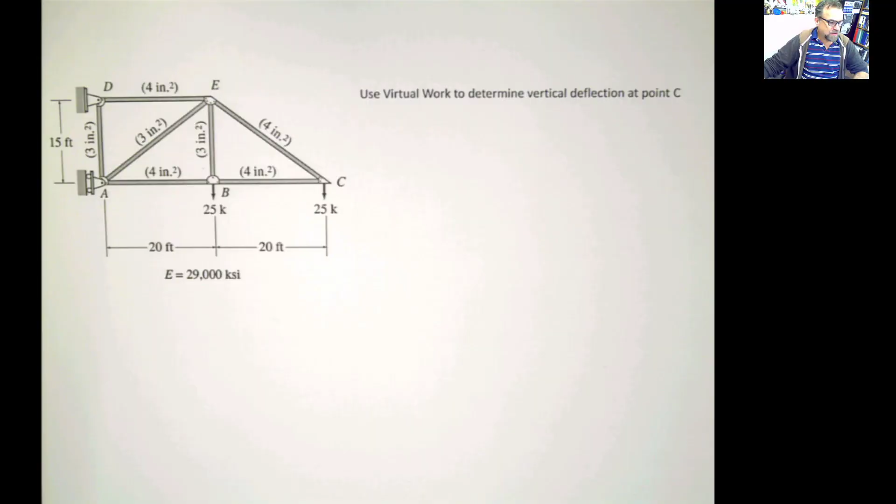So I'm going to solve this problem using virtual work. The problem is asking to calculate the deflection at point C. Let's start working that out and see how it works.

First thing I always like to do, remember the philosophy of virtual work: the external work has to be equal to the internal work. The external work is given by an external virtual force, which by convenience is given a value of 1, multiplied by the displacement or rotation in the direction we are looking for. In this case, we're not talking about rotation, we're talking about deflection.

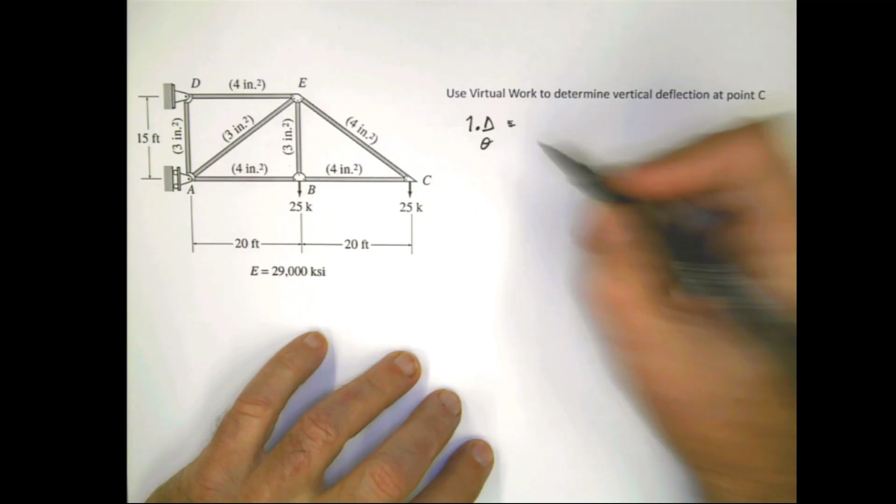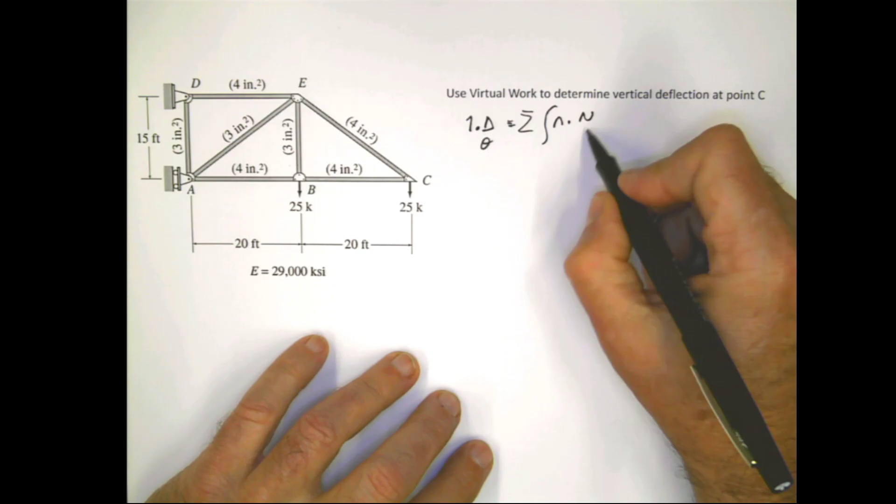That has to be equal to the internal work. The internal work is the summation of all those internal forces. For the case of the truss, it's only axial forces multiplied by the deformation, which is this one. Remember, deformation is PL over AE, and the internal normal forces - I'm calling them normal here instead of axial, because sometimes A gets confused with the area, and I don't want that to happen. So that's why I'm calling them normal forces.

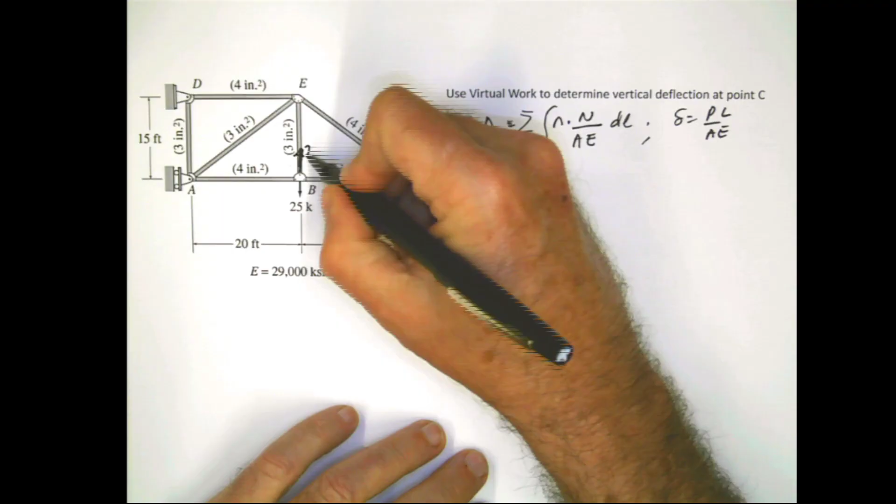First step for doing this is solving the real truss. How are we going to solve it? Depends on you. You can start from this joint if you want to, because there's only two unknowns, and then move here. If you look at this joint, immediately you can see that this force is 25. Just by doing the analysis over there, you can come to this joint and calculate this and that.

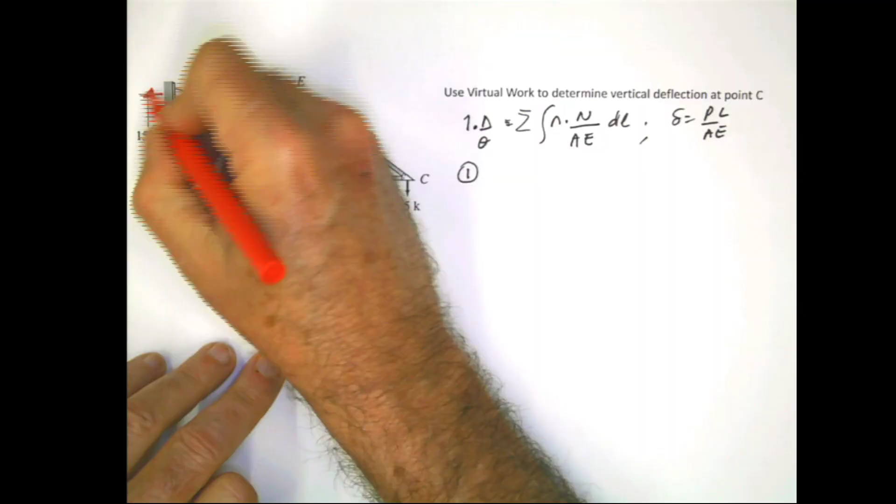But let's say you don't see that, and let's say you start doing reactions. So I'm going to start calculating reactions. The moment is here in this direction. This is going to be one force this way, one force that way - reaction dx, dy, and this is going to be in the other direction, and this is ax that way. There's no Ay here because this is a roller.

So let's start by doing summation of forces in y. If we do summation of forces in y, dy is going to be equal to 25 plus 25, 50 kip.

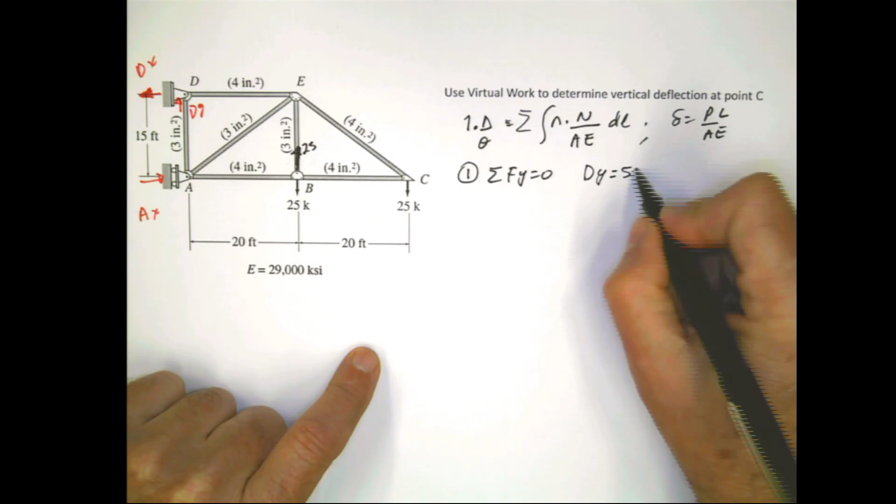Then we can do summation of moments, whatever you want. We can do summation of moments at A if you want. The moment here: we have dx multiplied by 15, 15 times dx, and then minus 25 times 20, minus 25 times 40, equals 0.

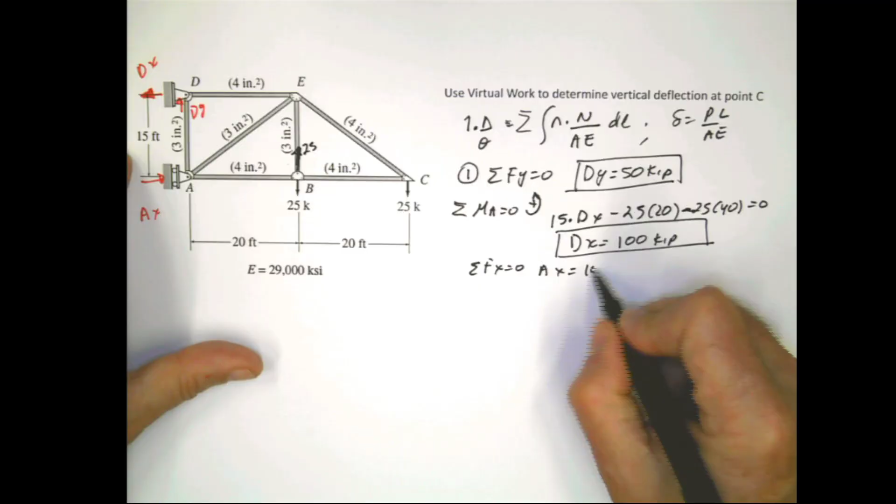From here you can solve for dx, which is going to be equal to 100 kip. This is 500, this is 1000, 1500 divided by 15, 100 kip. And now by doing summation of forces in x equals 0, you get that ax is going to be equal to 100 kip also.

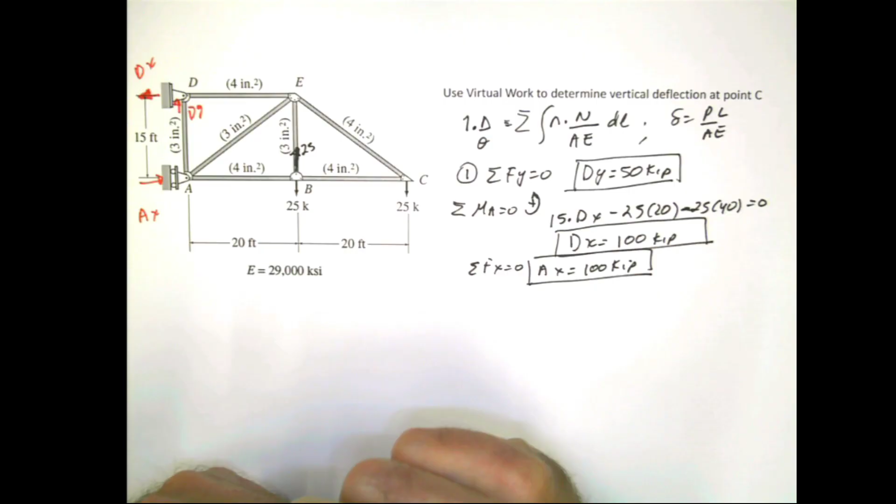Now once you have that, if you come to this joint, you don't even have to do the analysis of the joint per se, but you can. You can go to joint D, and put your joint D there, and then put this force here, which is dx 100, and then this force here, the force coming from the reaction in dy, which is 50, and I'll put the bar here also. This is the bar dA, which obviously goes in this direction, and then you have the bar dE in this direction. So from here you can see that dE is going to be equal to 100, and dA is going to be equal to - put here 100, this is not 100, this is 50.

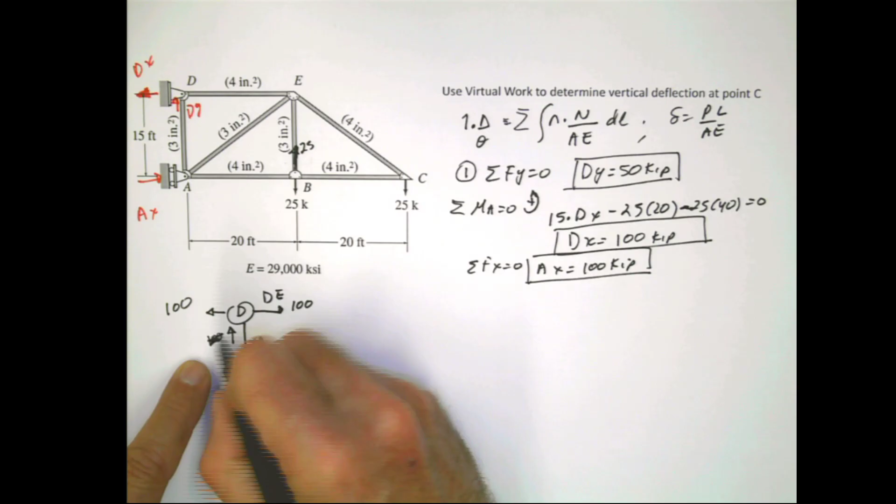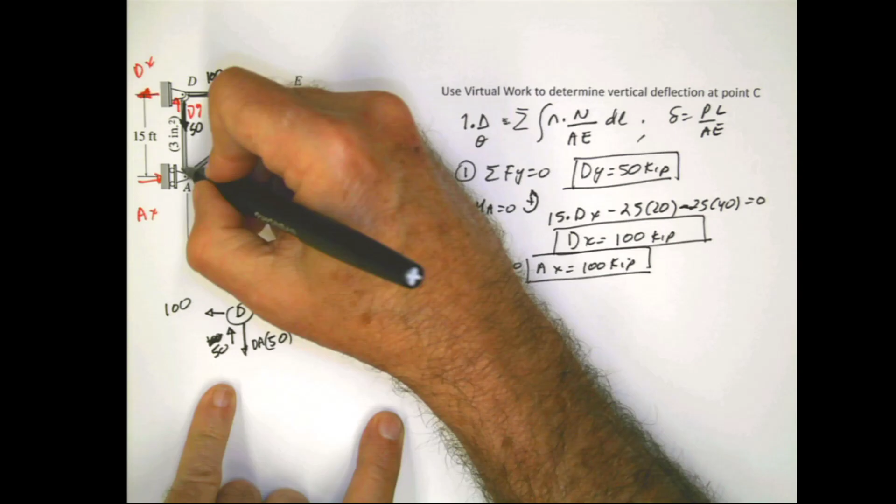50, so dA is going to be equal to 50 also here. I know some of you were yelling at me because I did that, but I'm not going to erase that thing over there - I'm used to being yelled at, so no problem. So this is going to be dy, and dA is going to be acting in this direction, and it's going to be 50. This is going to be dE, which is going to be 100 in that direction also. Meaning, if this is 50, of course you have 50 here also, in that way, and this is 25.

So now we can move to, let's say, this joint A, if you want to. So let's move to that joint A here.

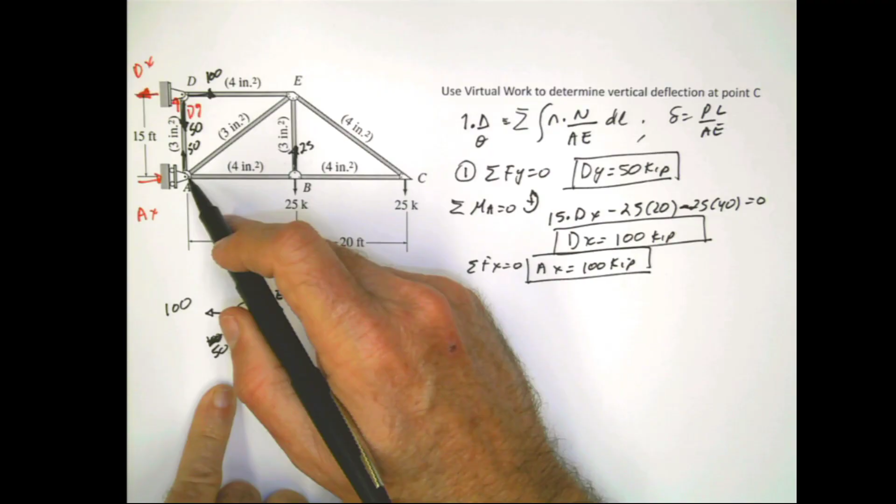AX 100, this is 50, which is the bar DA here, and then you have this, which is AE, and this is AB here. What direction goes this is up to you, but you can see that the diagonal, which is this one, is the only one in the vertical direction countering this, so it has to be like that in compression.

And the direction for this one, depending on this value, it will go to the right or to the left. I think that it's gonna go to the left, but in compression, but it doesn't matter. The sign is gonna tell you that.

And then you have this angle here, and that angle here, or you have this triangle here also. You can use the triangle, it's easier. Not easier, it's the same thing. This is 3,4,5, because this is 15, 4, 15, 20. Dividing that by 5, this is 3, 4, this is going to be 5. Or you can calculate the angle if you want to calculate the angle also.

First thing first, summation of forces in Y equals 0. If you do that, then you have 50 minus 3/5 AE equals 0. There's nothing else there. So AE is going to be 250 divided by 3, which is 83.3 periodic, repeated. And remember, that is in compression.

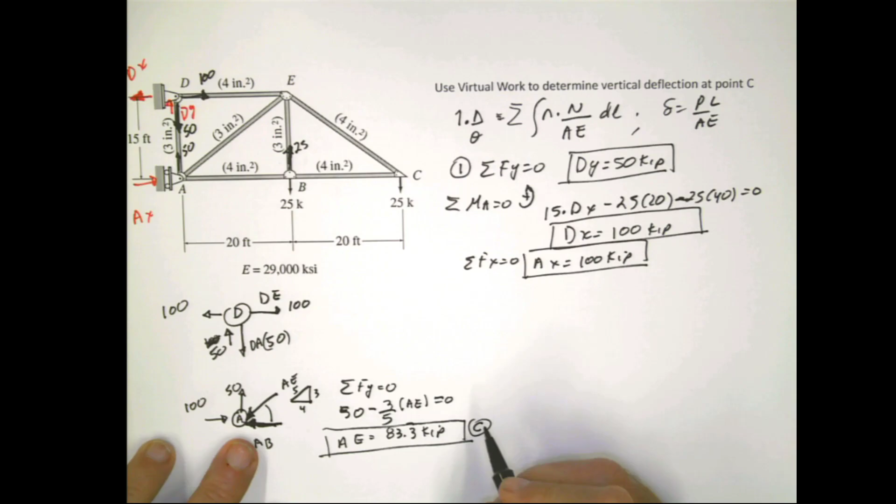I'm going to put that in case I forget, but it's given here. So I like to do this also, putting it there. And immediately after I know that, I'm going to do that there, and I'm going to do this here. And I know this is 100, and I know this one here is 83.3 periodic.

And now we can do summation of forces in X equals 0. If we do summation of forces in X equals 0, I have 100 minus 4/5 AE minus AB equals 0. And then you can solve for AB. And AB is going to be equal to 33.3 periodic kips, in compression also, because I assumed it was in compression.

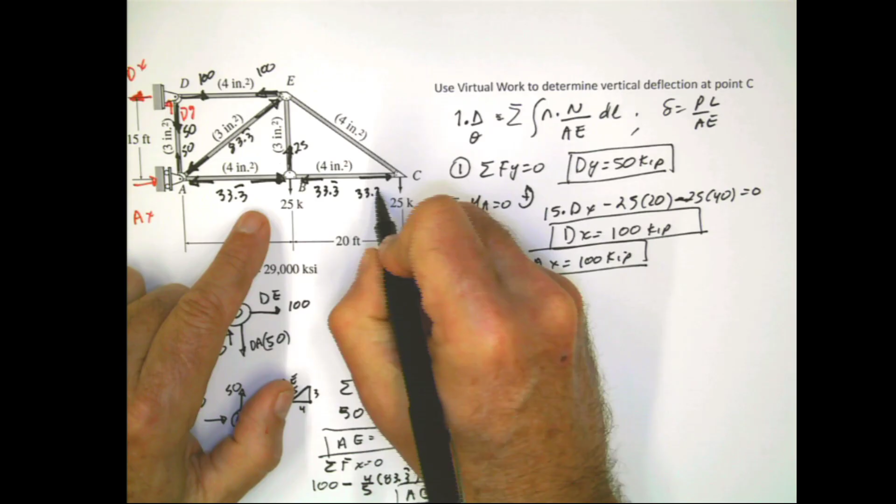So now we have this one also here, which is this and that, 33.3. This force here has to be equal to that, so this is also 33.3, as well as this one. And this one is 25, because this is 25. And the only missing force here is this one, which has to go in this direction.

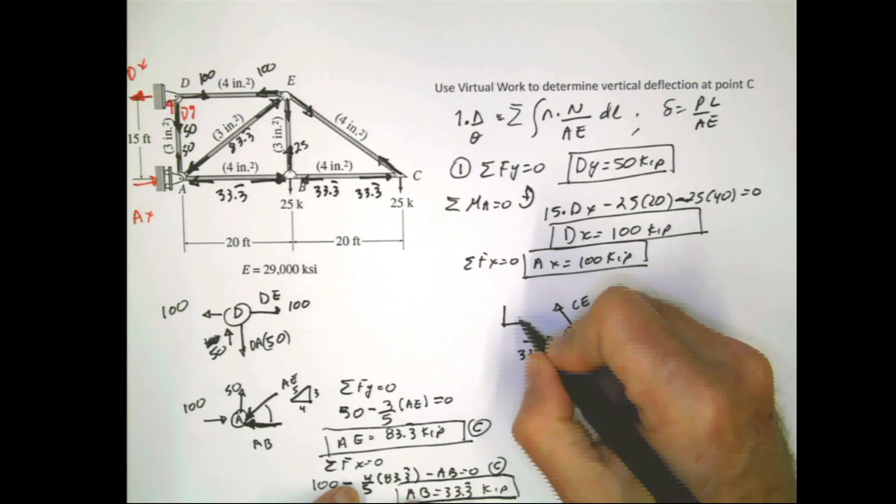So if I go to the joint C, you have the 33.3, you have the one here, which is the one that I'm looking for, CE or EC, and then you have this 25 here, and then of course, once again, you have the angle 3-4-5 here. So CE or EC, which is the same thing,

times 4/5, if you do summation in X, 4/5 minus plus 33.3 equals 0. So CE is going to be equal to 41.6.

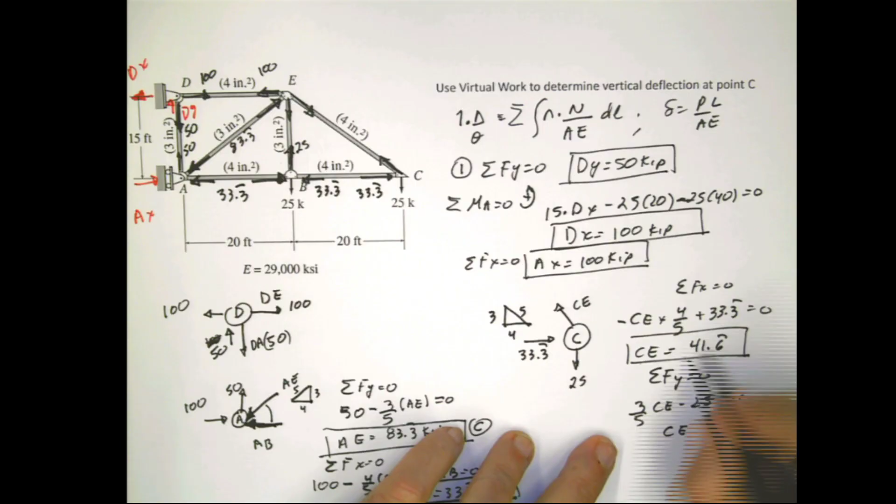And you can do also as well summation of forces in Y, just to verify this, and then you can say that 3/5 CE minus 25 equals 0, and then you're gonna get that CE is gonna be equal to 125 divided by 3, which is exactly 41.6 kip. So now we have all the forces in the real structure.

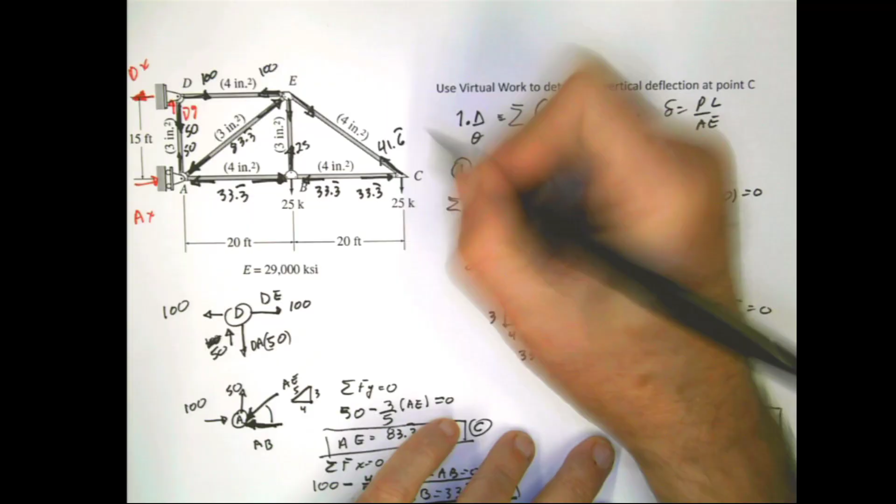Next step, we're gonna get those forces now, and we're gonna calculate those forces for the virtual structure. What do I mean by the virtual structure? Well, the virtual structure, the geometry is gonna be identical to the real structure, identical, same thing, I'm just using the same page. However, the only difference is that these loads are not gonna be there, and this load is not gonna be there also.

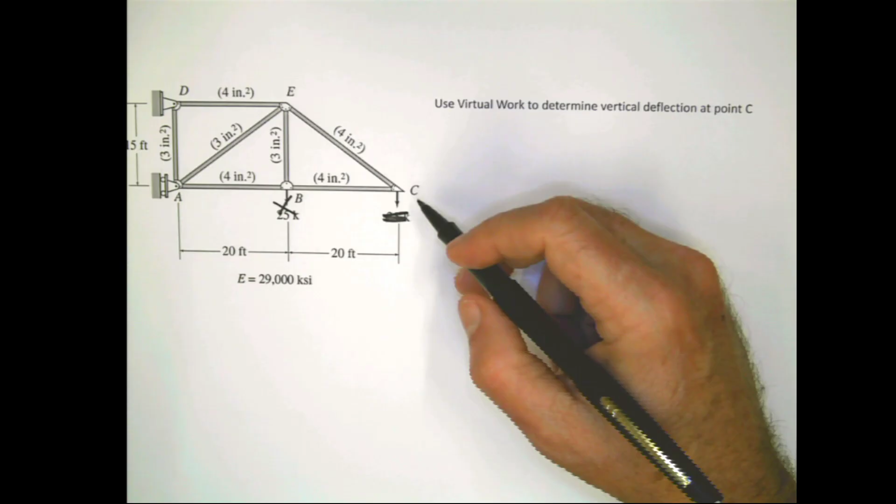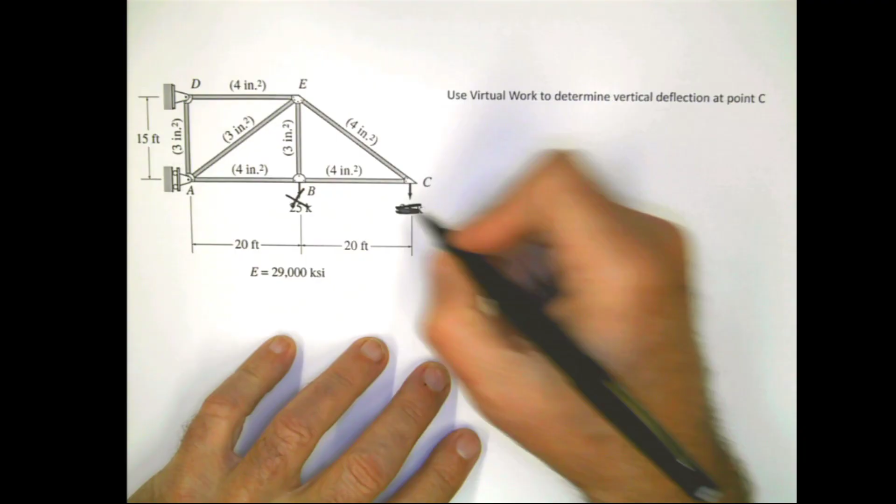So the only thing that you have to do in the virtual structure is placing a virtual load or a virtual moment, of course not in the case of trusses, because obviously you cannot have moment in joints, at joints. But you have to place, in this case, if we are looking for a vertical deflection at point C, then you're going to put a virtual load, any magnitude, any value, but if you use one it's easier, at the joint C. And then this will be the second step, which is calculating or working with the virtual structure.

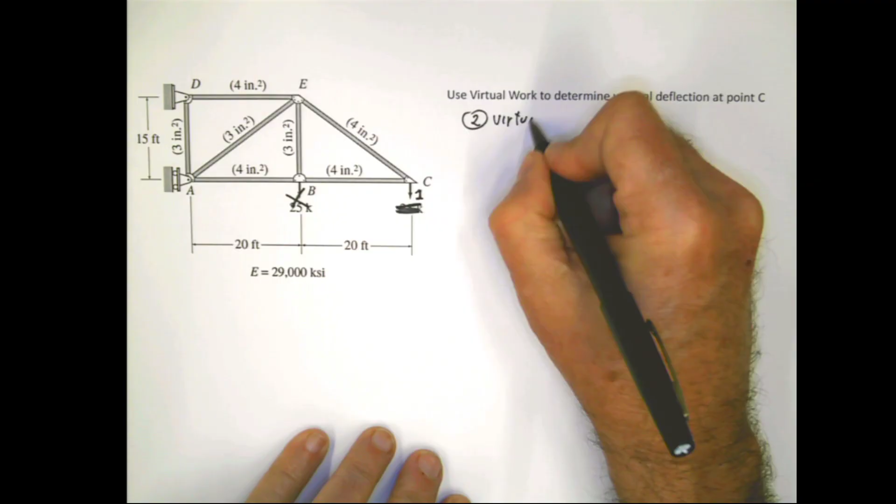I'm gonna put here in the first step, I just put the number, but let's put here the real structure. So basically we do statics, once again, in the real structure, and we do again statics in the virtual structure and calculate every single one of the forces.

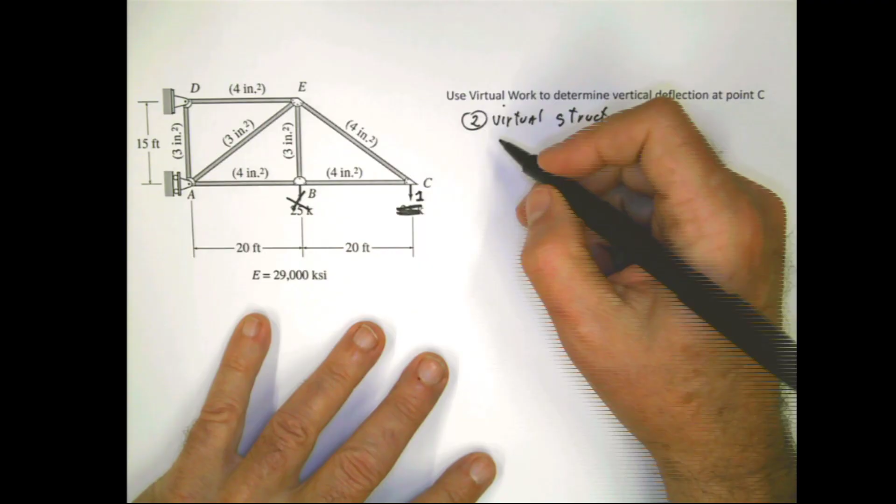Now, if this force doesn't exist, this is a zero force member here, zero force member here. If this is 1, in this case, then there's only one force, meaning the reaction for dy is gonna be equal 1. You can do it, I mean, but I know this is gonna be 1. You can do summation of forces in y equals 0. So dy equals 1. But if this is 1, then this force here is gonna be also 1, meaning this force here is gonna be also 1 by doing summation of forces in y in that particular joint.

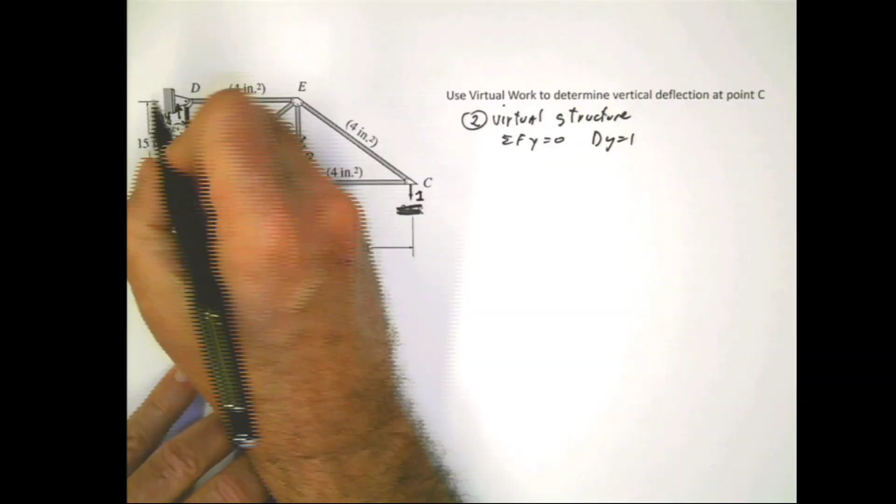Now, you're gonna have also dx here and ax here. The reason I put these directions is because I know that this force is gonna generate an overall moment in this direction, so this couple of forces have to be in the opposite direction in order to counter for that moment.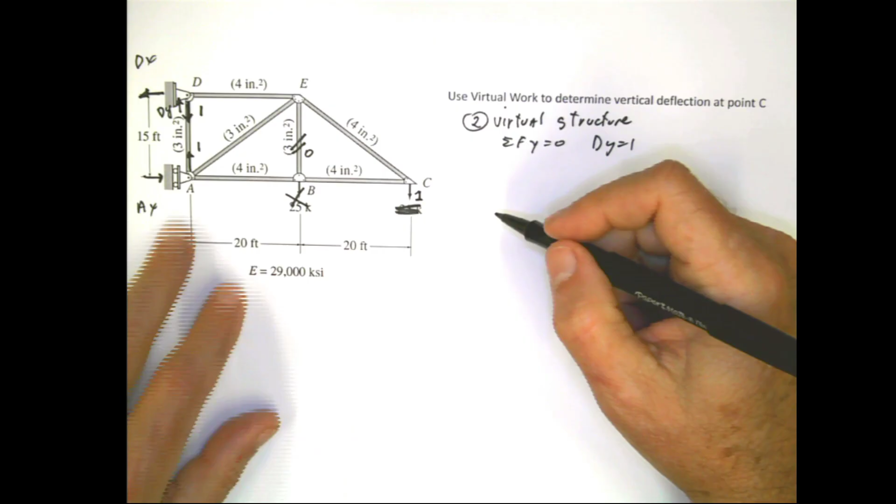So I can do the same thing. I can calculate summation of forces in y, and summation of moments at A equals 0. I can start from this joint and I don't calculate reactions. This is actually where I would start from if it's me doing the problem originally, but it's okay, it's not gonna take time.

So it's gonna be dx multiplied by 15, dx multiplied by 15 minus 40 times 1 equals 0, and then I can calculate the virtual reaction dx equals 2.6 repeated. And if we do summation of forces in x, it's going to be equal to ax also. There you go, so we have the 3 reactions here, meaning this force here then has to be also 2.6.

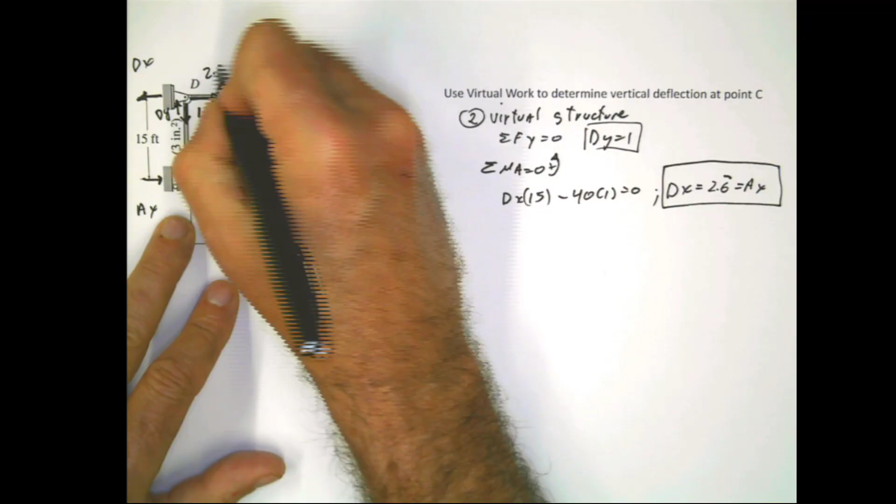As well as this one, because it's the same one there, 2.6. And then if I do summation, I can go to this joint A, and if you go to joint A, you have this force of 1, you have this force here of 2.6, which is the reaction, and then you're gonna have these 2, which is the AE virtual and AB virtual.

Now, of course, this force has to be in compression, and apparently this one is also in compression, but if you don't see it, it's okay, you don't have to do it. And remember, you have the same triangle, 3, 4, 5.

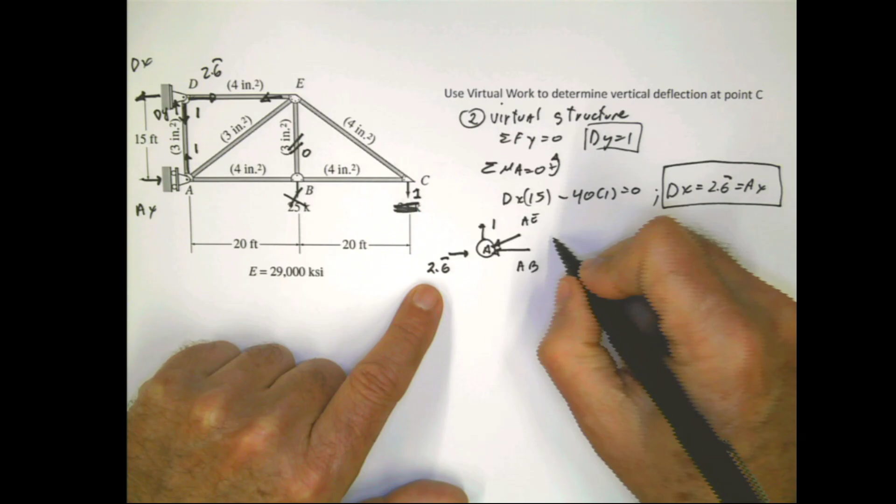So I can do here summation of forces in the y direction. So I have summation of forces in y here, and then I have this 1 minus AE multiplied by 3/5 equals 0, which tells me that AE is equal to 5 divided by 3, 1.6 repeated.

Remember, we don't have units here, or we might have the same unit as the other one, like kip, but I don't put the units here and I correct at the end. That's what I do. So 1.6, meaning this is 1.6, I mean AE, right? Yeah, AE is this one.

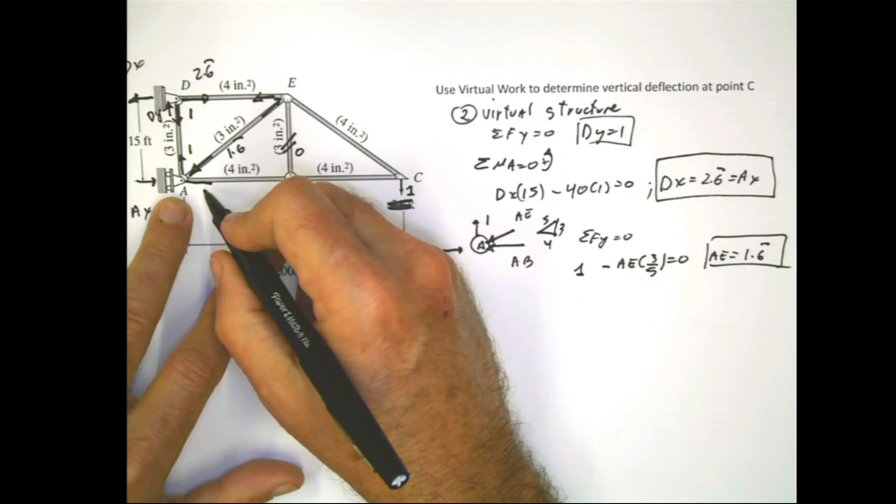1.6, meaning this is gonna be also 1.6, and then I can do summation of forces in X equals 0 here. So if I do summation of forces in X equals 0, then you're gonna get 2.6

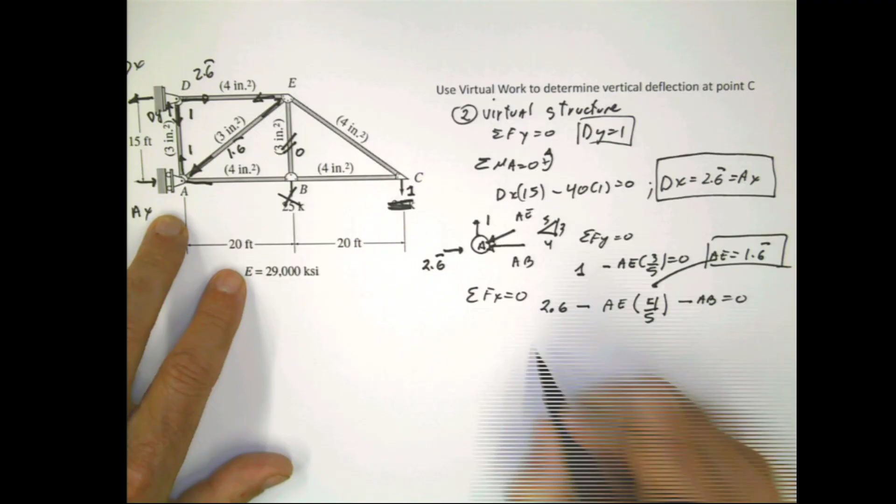minus AE multiplied by 4/5, minus AB equals 0. AE is this value, so AB is gonna be equal, let me see, 2.6 minus 0.8 multiplied, 0.8 by the way is 4/5.

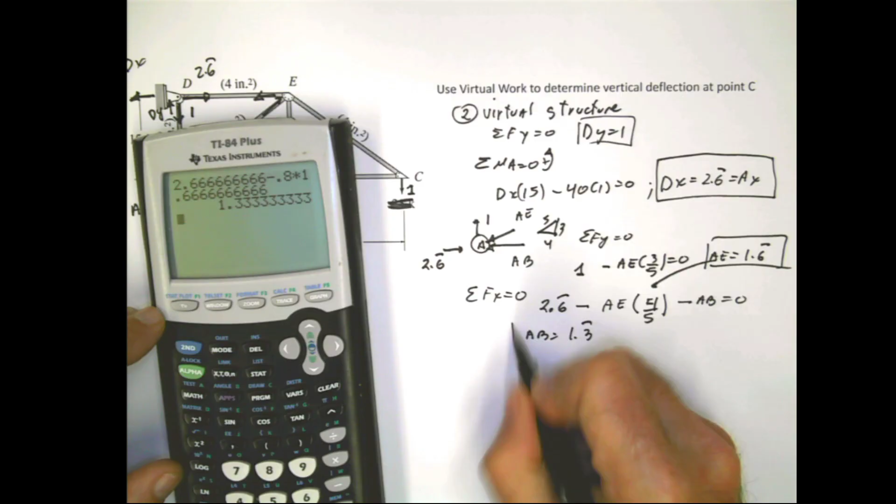Some people tell me, why do you put 0.8? 2.66666, and this was 2.6 repeated. Minus 0.8 times 1.6 is 1.3 repeated. So this is gonna be 1.3, which is gonna be 1.3, and this is also 1.3.

Now the only missing one is this one, and in order to do that, you can go to joint C. 1.3, and then you have this force here acting in this direction, and this angle here once again is 3, 4, 5.

So this force here, which is called CE, by doing summation of force in X or Y, let's do it in X or in Y, minus 1 plus CE times 3/5 equals 0. So it's going to be 5 divided by 3, meaning CE or EC, whatever you want to call it, is 1.6.

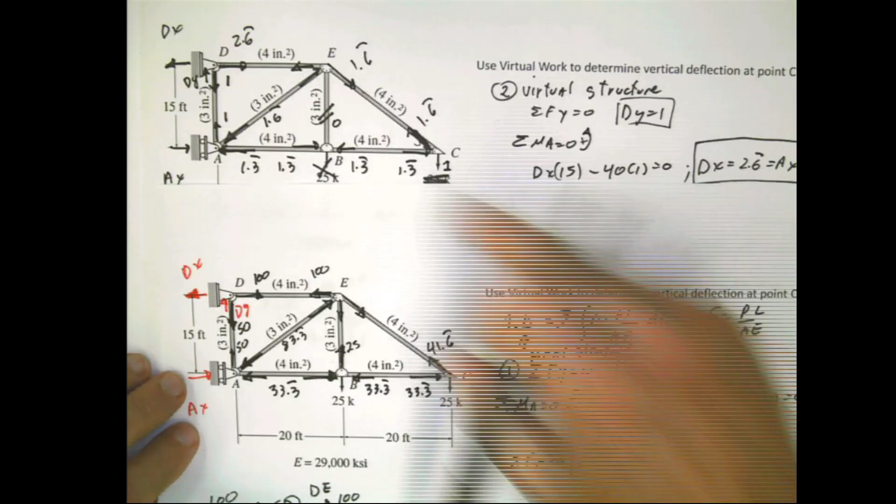And you can verify that. So now this force here is 1.6, and this one here is 1.6. Now, what we have so far is this, we have our virtual structure, we have our real structure.

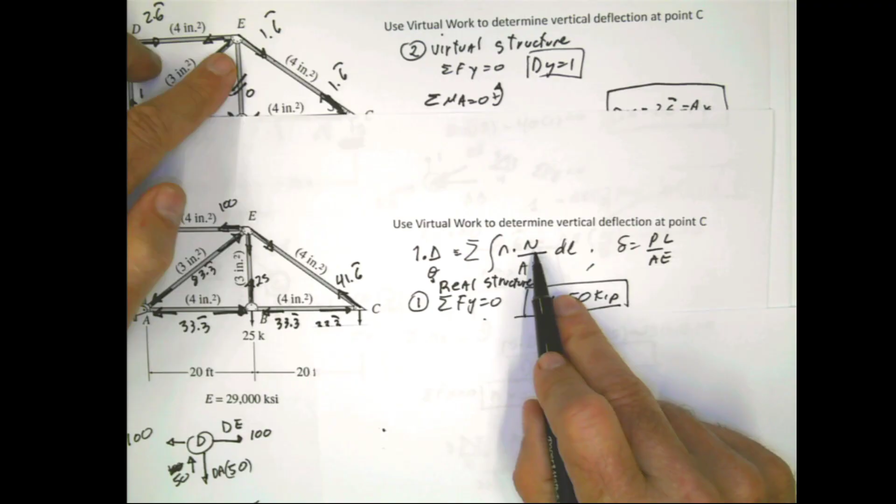Based on those, what I like to do is prepare a table, because what I have to do is apply the general rule or the general principle of virtual work. So I know that I'm going to need to multiply small n, meaning internal forces here, and big N means internal forces here, and divide that by each one of the areas and by E, and multiply by the length. So I'd rather do this, and it's more organized if you do it.

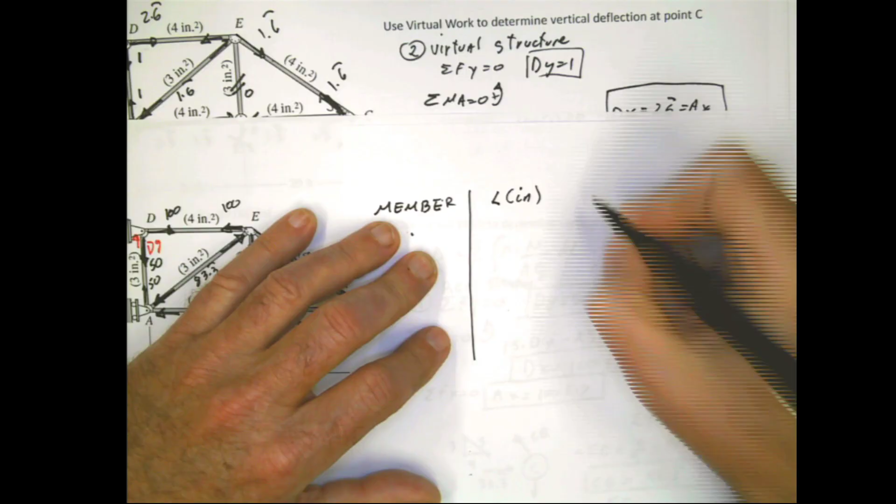So I'm gonna put the member here. I'm gonna build a small table: member, and then I'm going to put the length here. I'm gonna convert that in inches for unit coherence, and then I'm going to put the area, because as you can see the area changes in the different members, in inches squared.

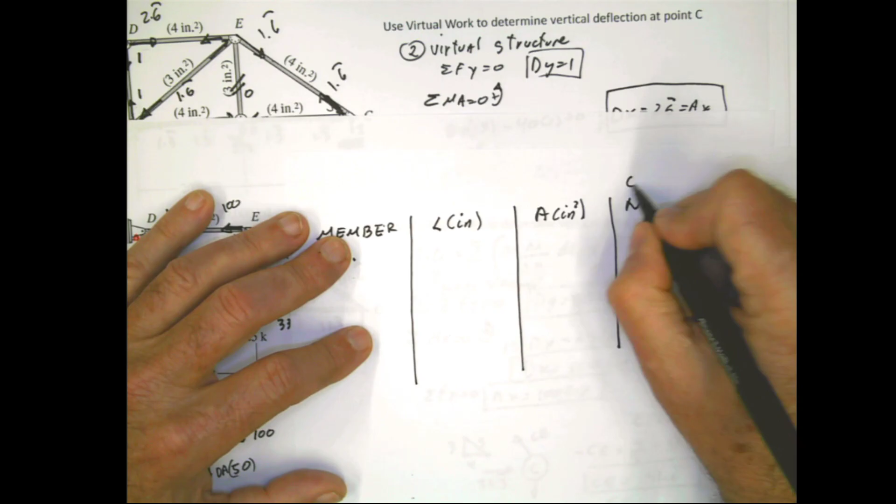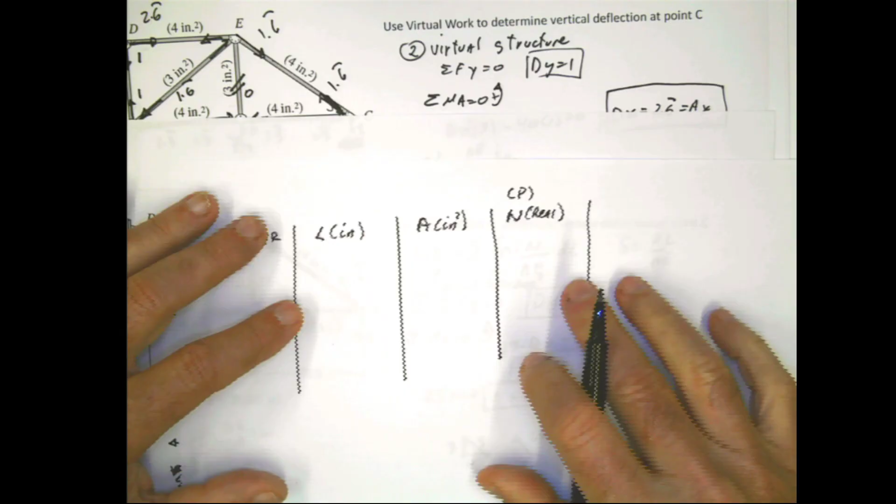I'm gonna put here the real force, which is called capital N, or P, the real force. And I'm going to put here also the virtual force, small n, or it's called also U, and this is the virtual force. And then I'm going to create, because E is constant, I'm gonna keep it outside, this E.

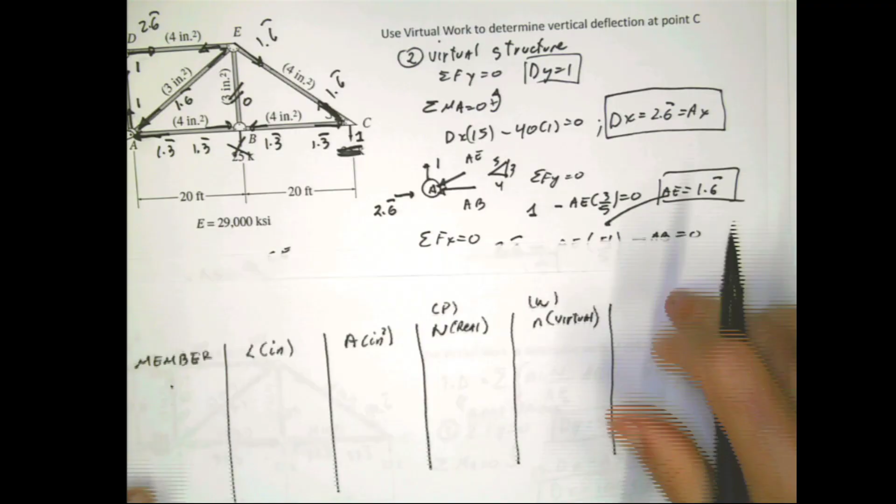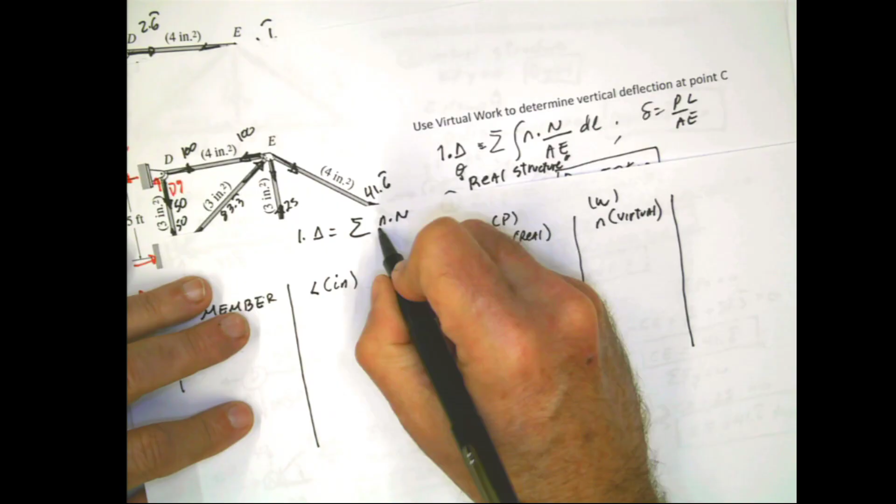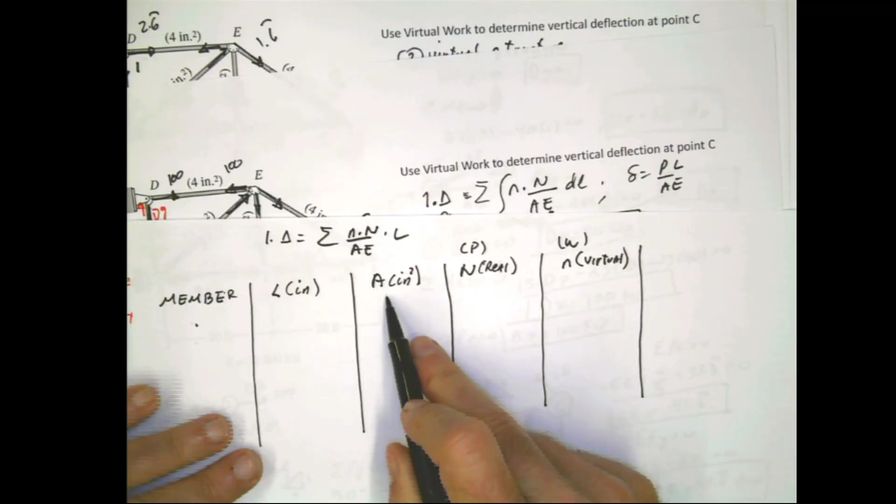I'm going to copy that equation here on top. So 1 times delta is going to be equal to the summation of n times N divided by AE multiplied by L. This is what we have. So I have n, big N, small n, I have L, I have the area, and E is constant.

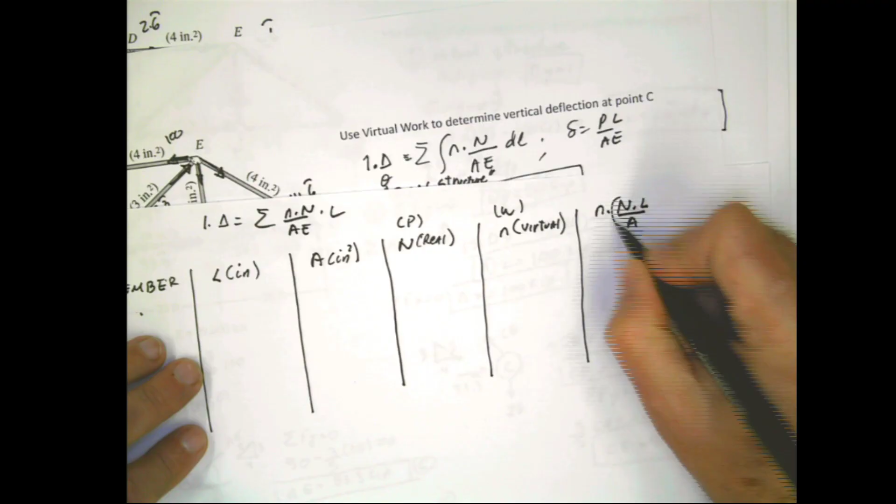It says here the material doesn't change, so E is constant. I'm going to keep that E until the very end. What I'm going to do is multiply n times N times L divided by A, add all of these, and at the end, whatever I have, I multiply by 1 divided by E, because I'm not going to do that multiplication for every single member every single time.

So I'm going to list the members: AB, BC, DE, what else? AD, BE, what am I missing? AE, and EC. I think that's the only thing I'm missing. 1, 2, 3, 4, 5, 6, 7. Good, so this is the table that we're going to be building.

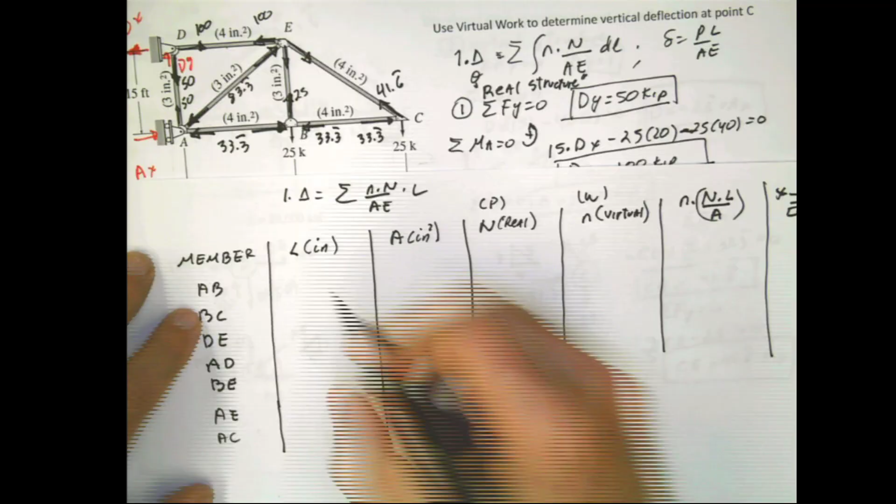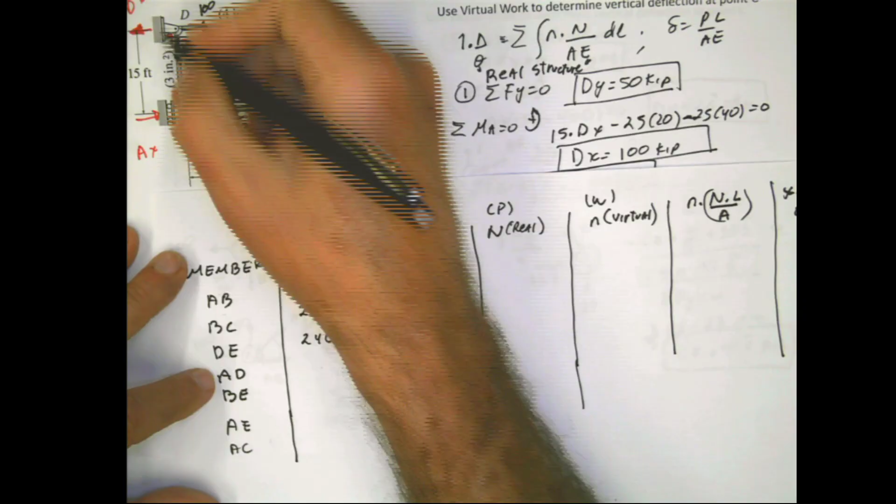Member AB, AB, AB. What is the length of this member? It's given, it's 20, times 12 to convert into inches, 240 inches. And this is also 240, 240. AD is 15, 15 times 12 is 180. BE, 180 also. AE is the incline, this one.

So the incline is going to be 240 squared plus 180 squared, to the 0.5, square root, 300, because this is the hypotenuse, the diagonal. And AC is the other diagonal, and it's also 300.

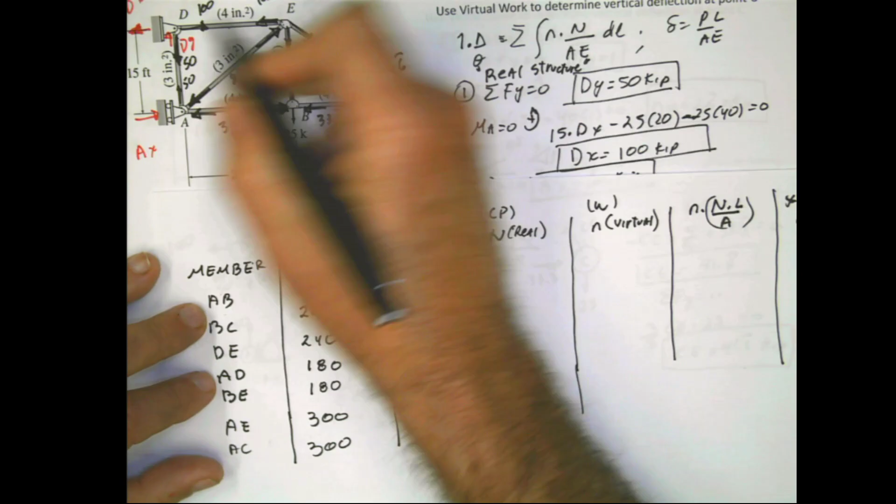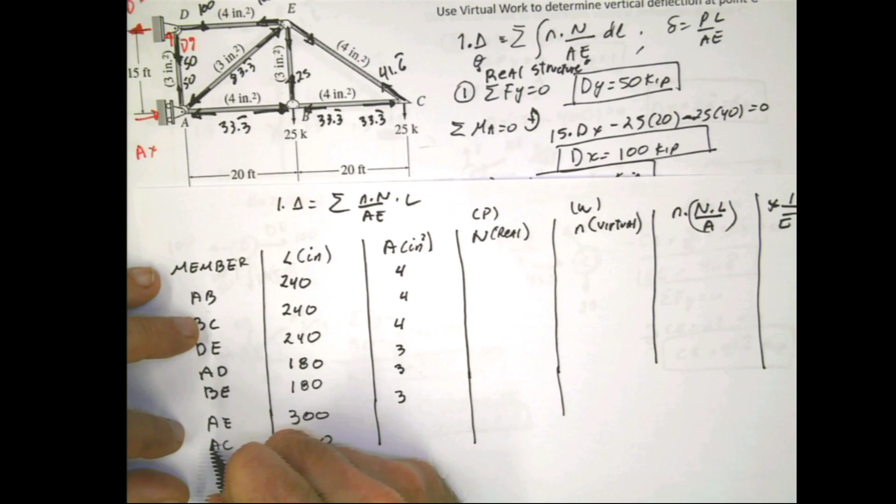Now the areas, you can read the areas from the information provided by the problem. The area for AB is 4, and this is also 4 square inches, and this is 4, and 3, and 3. BE and AE is 3. And what is AC? AEC... EC, so EC is 4 square inches.

Now I'm going to put the internal forces for the real structure. Look at that, but remember you have to keep the signs. So for AB, it's 33.3 in compression, so put the negative sign as compression. One thing I really advise you to do, if this is periodic or repeated, put all the decimals that you can in the calculator. So once again, this is also BC.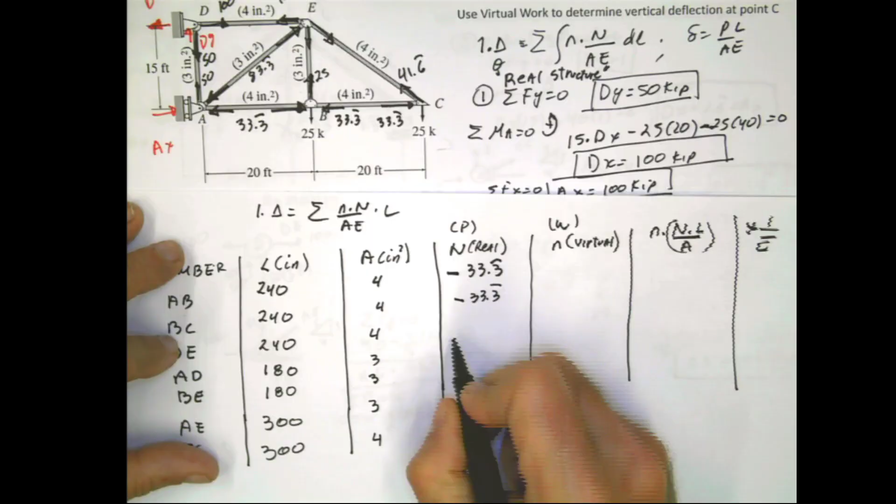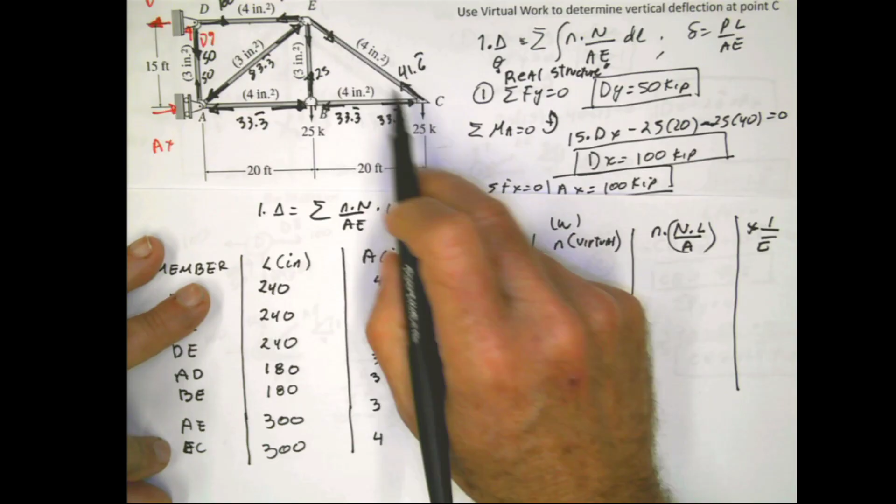BC is the same, 33.3 in compression. Now DE, where's the E? 100 here, tension. And then AD 50, BE 25, AE 83.3 in compression, and EC 41.6 here.

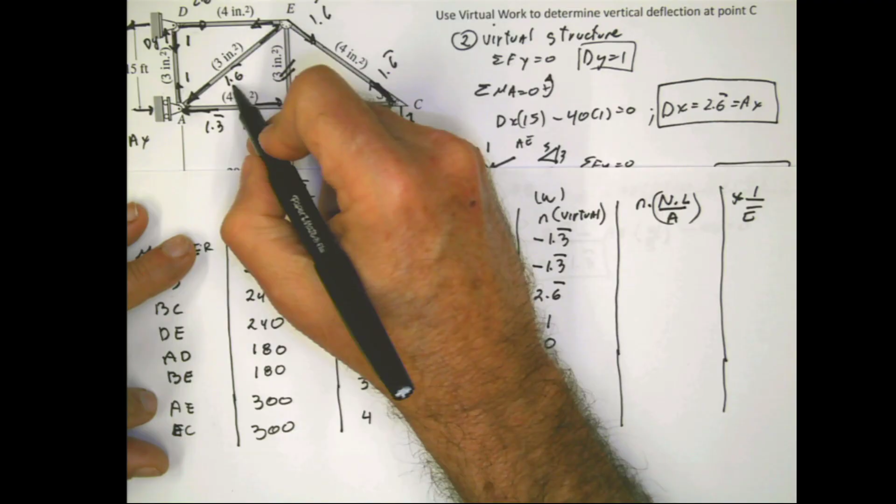Now we do the same thing here for the virtual structure. We start AB negative 1.3, BC negative 1.3 also, DE 2.6, AD 1, BE is a zero force member, AE is this one, 1.6, but it's negative in compression, and EC 1.6 right there.

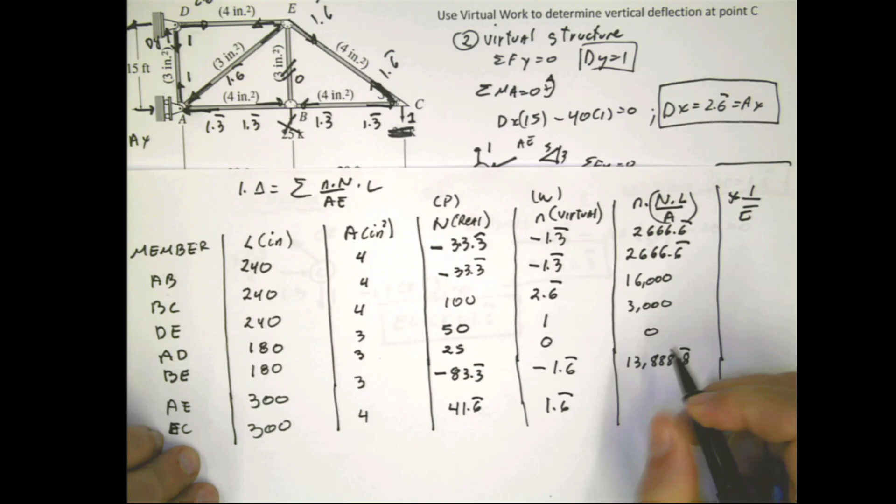Now what do we do? We multiply this times this times this and divide by that. That's what we do. By doing that, this is going to be 2666.6. Same thing here, this is going to be 16,000, 3,000. This is 0 because this is 0. This is 13,888.8, and this is 5,208.3.

Now what do we do at the end? Summation, summation, summation, that's what the equation says, right? We add all of those, and that's going to be 43,430. Then I get this value and multiply by 1 divided by E, and the result will be this. So delta is going to be equal to 43,430 divided by E, which is 29,000. And if you check, the units are going to be coherent, because this is all in inches and kip, and this is also KSI, so the final result is going to be in inches, which is what we're looking for, and this is 1.5 inches.

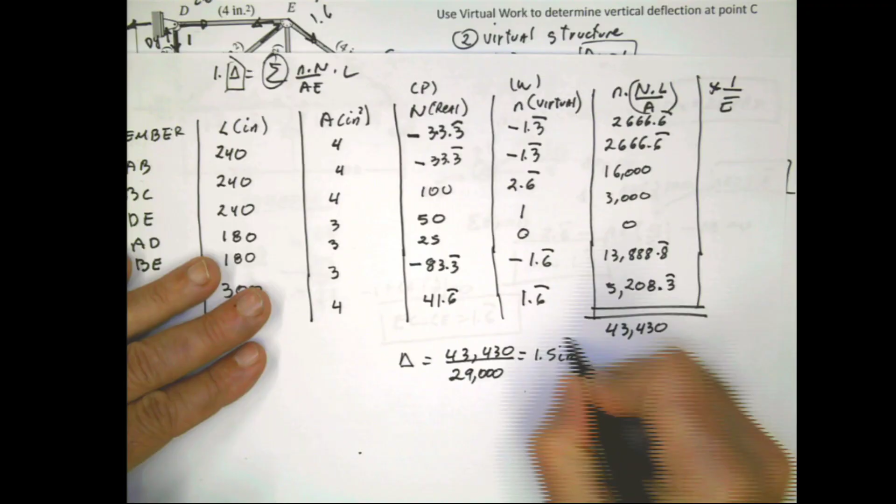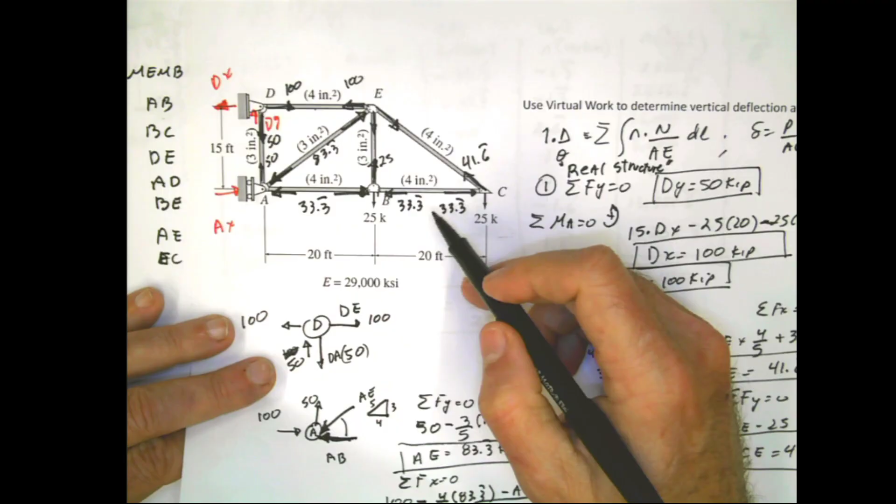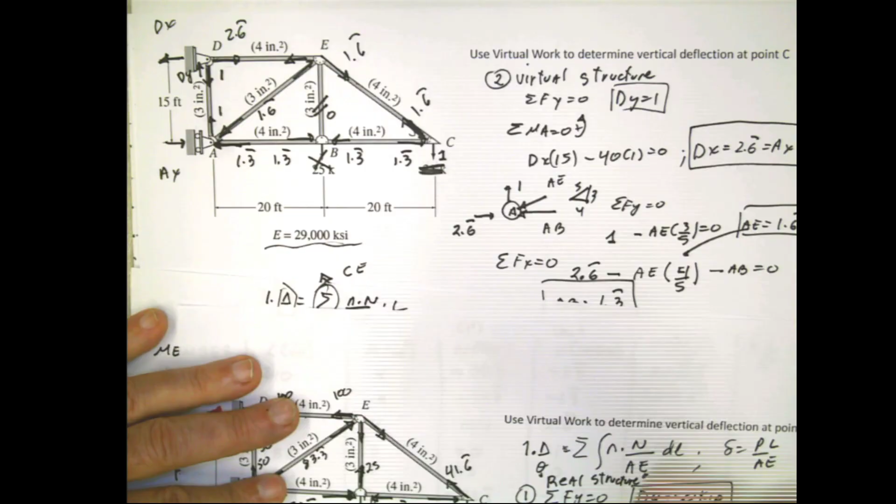1.5 inches. Now, this is what the problem is asking us: determine the deflection of point C due to those loads. Repeat the procedure: do statics in the real structure and calculate all the internal forces. Do statics in the virtual structure by placing a unit load in the direction and at the point where I want to determine the deflection. Apply the virtual work equation, external work equal to the internal work, build a table, and calculate the result.

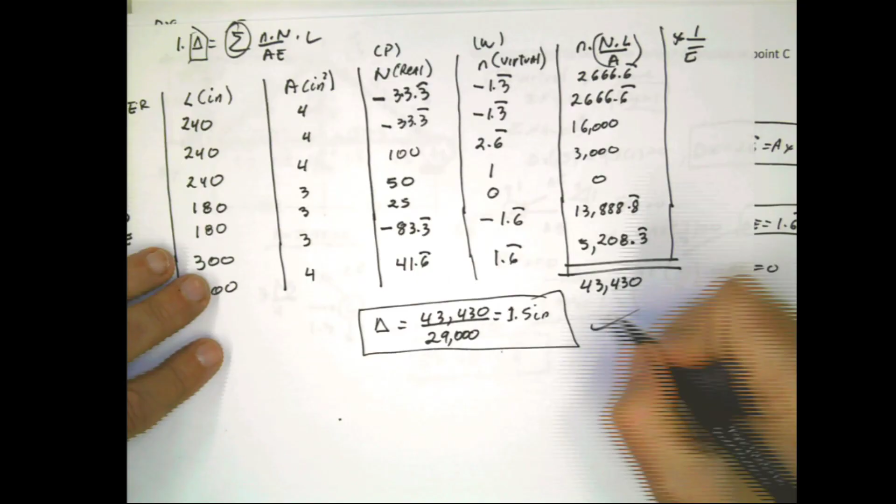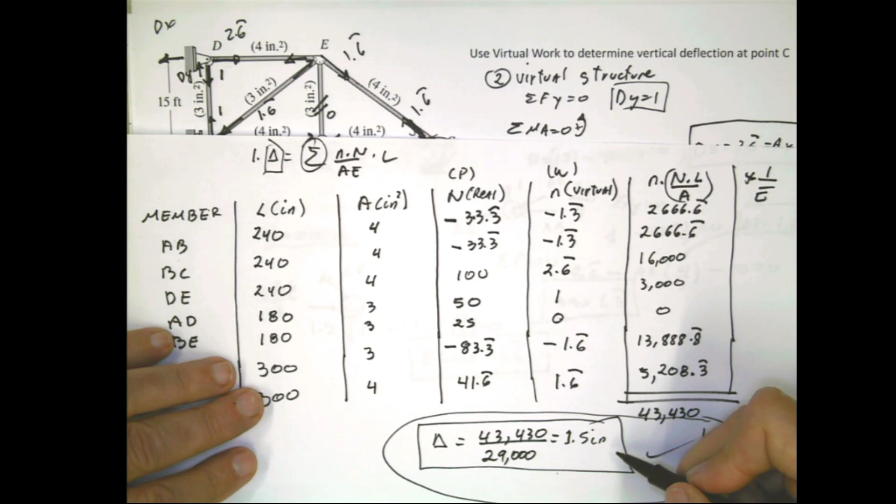Now, just an idea for the end. You have here 1.5 inches, and this is positive, right? However, look, the deflection that we found, we put a unit load pointing downward here, meaning this is a 1.5 deflection downward in the same direction that we put the load. If I got a negative value, and originally I assumed this going down, that would mean the deflection would be pointing up and not down. But because it's the same sign as the direction, positive, that means the deflection goes in the same direction that I put my virtual load.